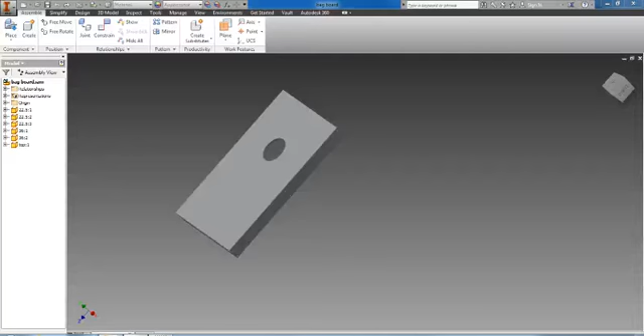Alright, the last step we need to do before we start building is assembling and putting this all together. Before we put anything else together, we've got to put a hole in the side here to bolt our leg assembly onto.

To do that, I'm going to go up to 3D Model and create a 2D Sketch on this side. This is just like if we were on a part file, but now I need to outline the edges of this board.

To do that, I'm going to select Project Geometry. I'm going to click the bottom of the board, and the end of the board. Then I'm going to use the point tool.

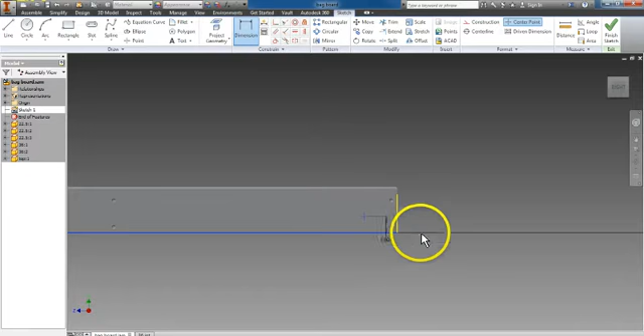I'm going to put a point on there, select dimension that point from the bottom, so select the bottom of the board and the point. I want that dimension to be 1.25, and then I'm going to select the end of the board and then the point, and I want that dimension to be a 2.

Then go back to 3D Model, Finish Sketch. I'm going to select Hole Tool, and it should automatically select your hole. The termination should be through all, and the diameter should be 0.375.

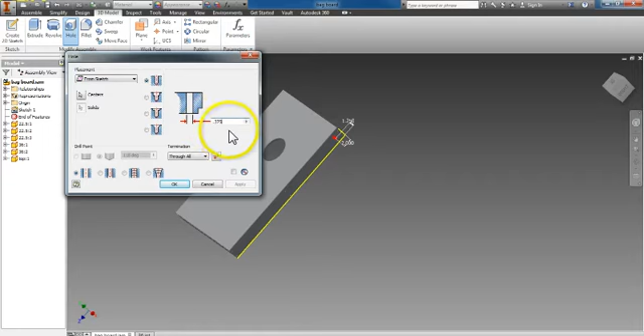Select OK, and then if I were to orbit around real quick, I should have a hole that runs all the way through, in one side out the other, of my bagboard base.

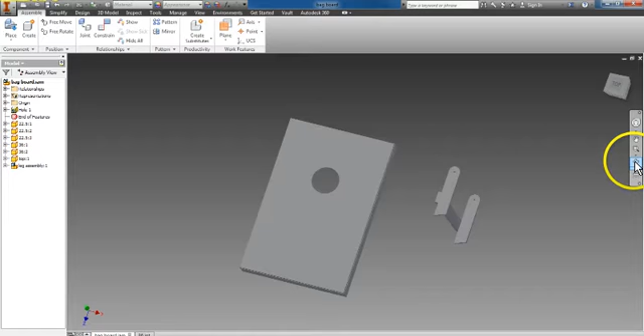Then I need to go back to the Assemble tab up here, click Place. I'm going to place the leg assembly on here. Now this one might get a little bit tricky, but I need to constrain this center hole with that hole there.

So I'm going to go up to Constrain, make sure we have the Mate function selected. I'm going to zoom in. I'm going to find the center axis of the hole.

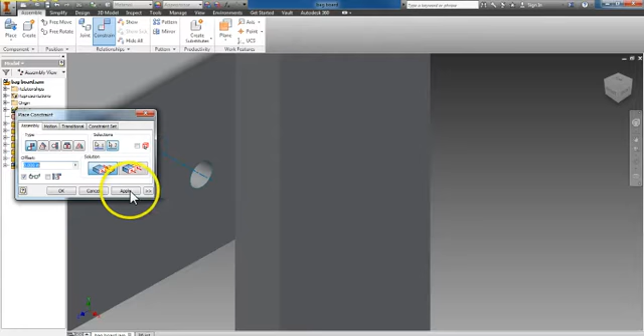Now see how I have my mouse on that dotted dashed line, that axis? Select that axis, and then you also need to select the axis of the hole in the bagboard base. Click Apply, and now I have those axes selected.

Now I need to select Flush. I'm going to flush the outside of this and the outside of that, but my offset is going to be negative 0.75. So apply that offset.

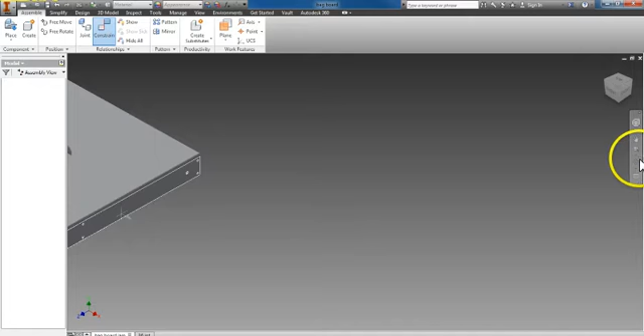And you should be done. So now if I rotate this around, I'll just click Home. You can see the leg folded up underneath of there, but I'm going to rotate this a little bit, and I should be able to grab that leg and it should flip out just like that.

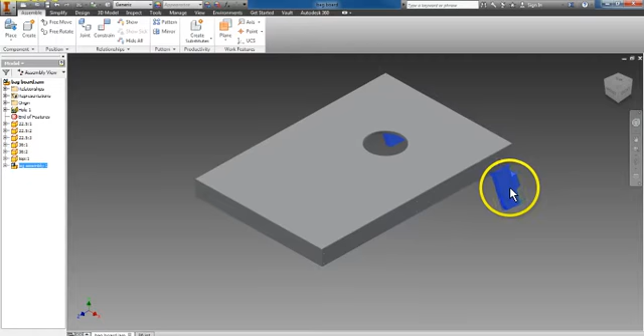Now if I click on Home, you can see how we have our bagboard legs assembled, and they swing on that pivot point and they sit flush. So now our bagboard 3D model is complete.